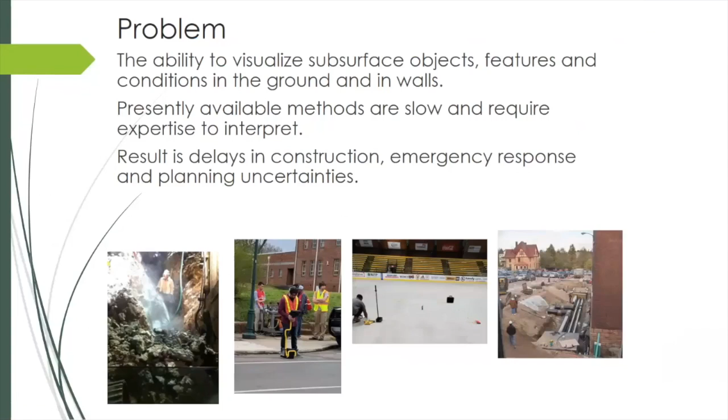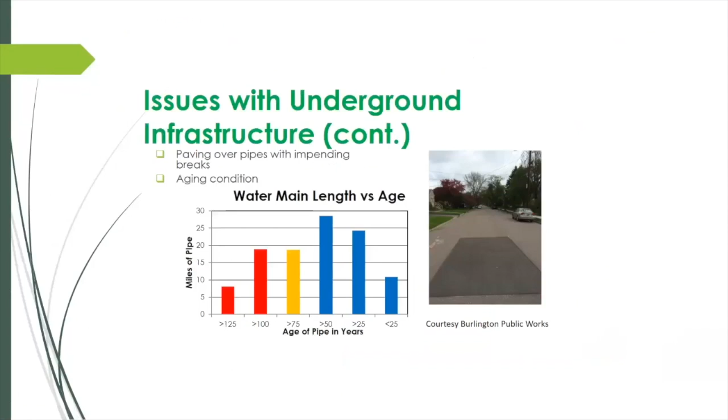Again, aging infrastructure, everyone's heard that talked about. You pave the road, and the winter does all the damage. It's annoying. So it's sort of a dream. The dream is when you put all this stuff together, like we heard: the physical locating, underground map, sensor network, other information, geosensing, verification, and security. If you can do all this. We're just doing a small part of that.

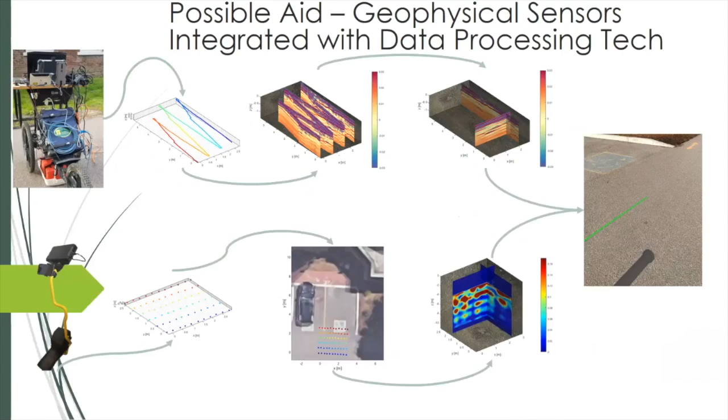One is to integrate the physical sensors with photogrammetric data processing technology. Here's two of them. Both of these are being fitted with augmented reality tools, gaming tools, for photogrammetric positioning. That allows you freeform and much more rapid selection, zigzag, something that's not easily done with these other instruments. Here's ground penetrating radar, 400 megahertz antenna. So here we have a smartphone, a camera, and gaming software feeding into Unity. Tango has now been replaced by Google's ARCore. Georeferencing with this system.

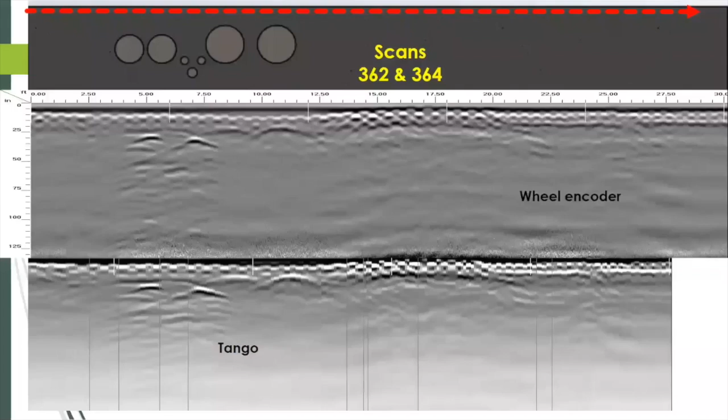Done several field tests, at least proof of principle. Here's a set of steam pipes in Chattanooga, and we can scan them and compare that with the measuring wheel. Nice looking data, at least for the very first system. Went out to Vallejo, California. They have a boneyard where public works stores all the pipes. And this is an indication of how challenging things can be with GPR. GPR only works in certain soils. This is the soil condition of old shale, clay shale. It can't penetrate very far, and we get trenches and trenches.

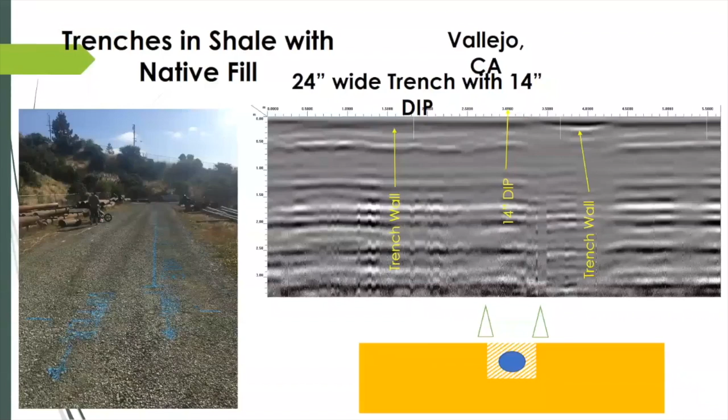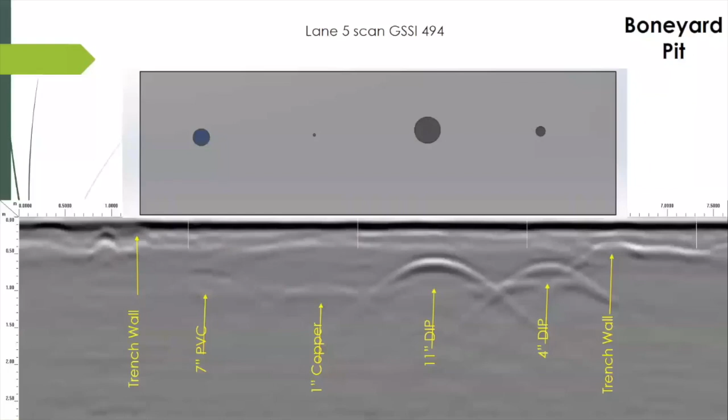This is a test pit. It's filled not with shale, but with native fill, backfill. And indeed, now the instruments photogrammetrically registered find pipes very nicely. Vine Street in Chattanooga. Again, found the pipes. There's a GIS overlay, but we're not allowed to show that. We had to sign with American Water. They said that they were right there. One's a main, one's a sewer main.

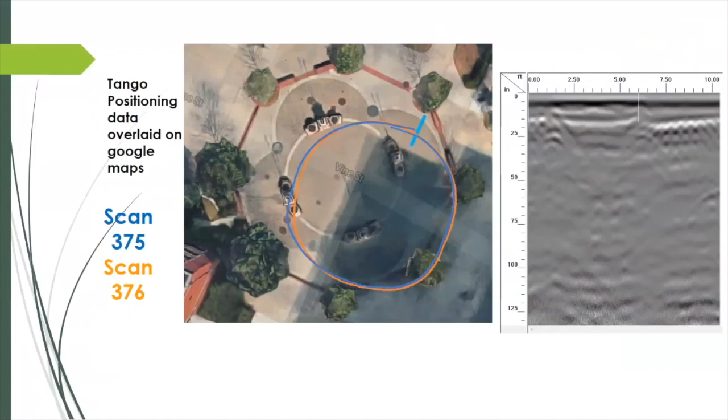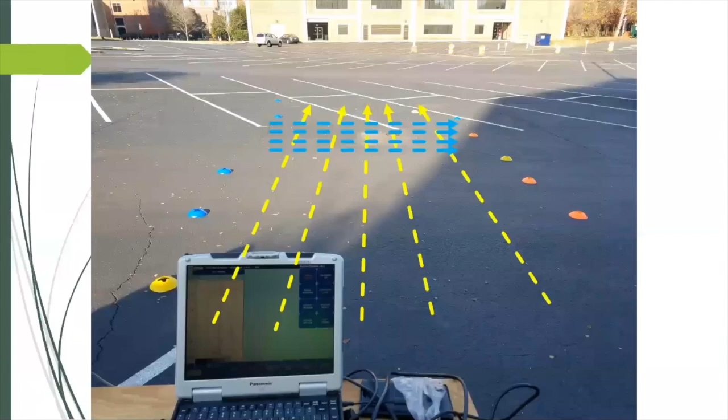And you can go in circles as well. And there's a wrap of a couple circles, just a piece of the data. We can go in circles, something that's not possible easily with a traditional GPR. Sinkhole again, covering an area. Parking lot sinkhole, you can map it out, that takes a while, or you can just come out here and scan. And what's in the sinkhole, you think of the foundation, certainly not a big hole.

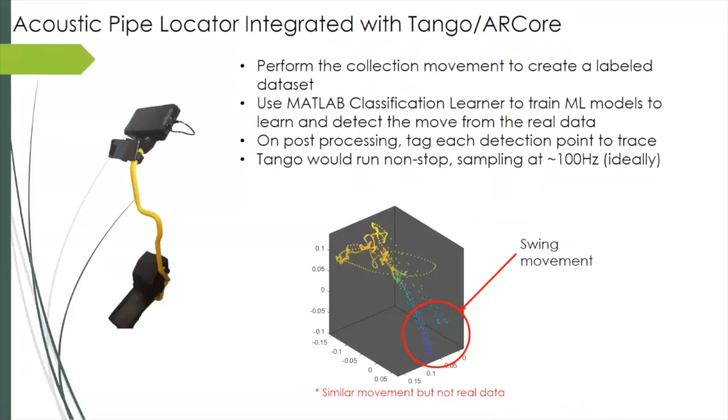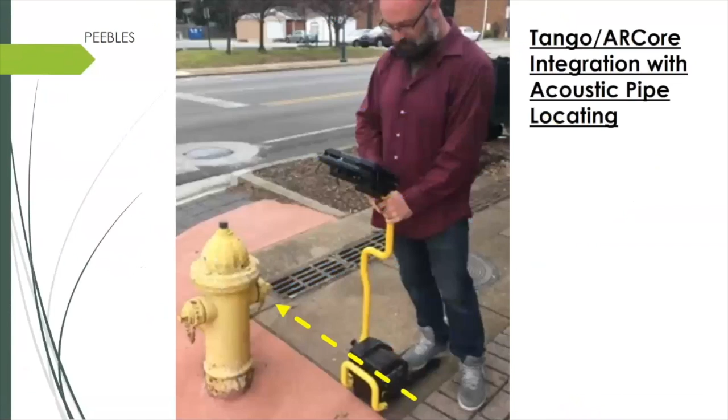Same with acoustic pipe locating. The acoustic system, you put the phone on there and get the 3D movement. This system has sort of an awkward movement for a traditional geolocator, in that you tilt it, lean on it, step on it, tilt it, lean on it, step on it. You can pick all those up and score it. So you can march around nicely with it. Here's movement of it, bringing a couple scans. Here we're doing it quickly along a fire hydrant. There's some nice pipes these instruments can discern. Again, this is GPR denied soil conditions.

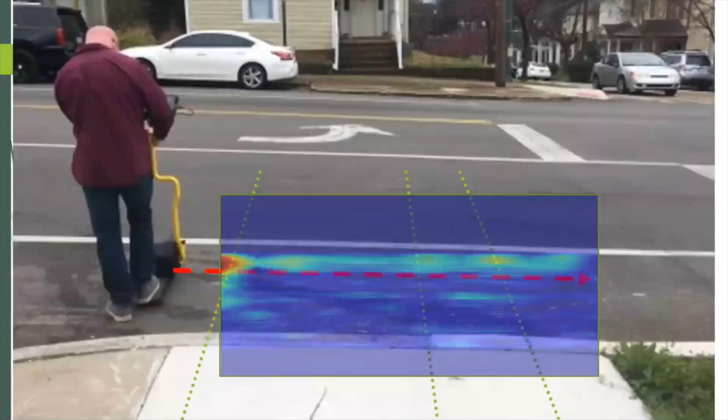Heard mention today of Internet of Things. Saw some nice data from sensor arrays.

Wi-Fi and wireless signals do not penetrate the ground very well. So you can run wires; it's one choice. Expensive, but works. Or you can try other electromagnetic bands. And one that's been used for some time, but is technically challenging, is low frequency waves. Here's a Navy base in Cutler, Maine that uses low frequency waves to talk to their submarines.

The basic idea is that you're transmitting the magnetic field side of the electromagnetic field. It's propagating. Can you do this for an Internet of Things, a subsurface infrastructure? So what's happened is some of the pieces have come into play. One is the magnetic signaling. Big difference. The traditional system uses large antennas, oscillating the currents.

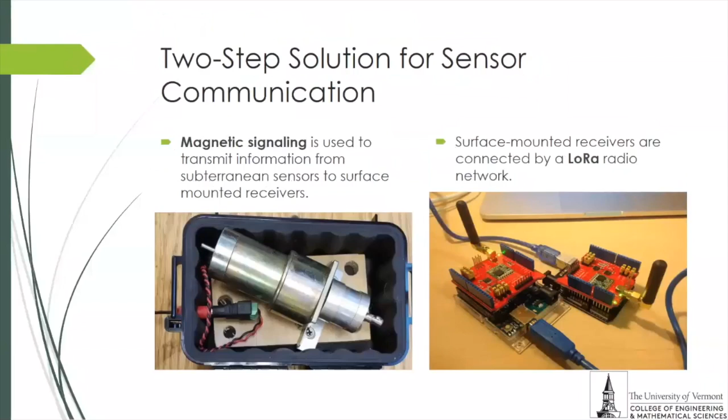Now you can do rotating neodymium magnets, something that's really only been possible in the last 20 years. They've become powerful enough, rare earth. So you just keep getting them from abroad. In traditional Internet of Things technology now, LoRa is a couple years old. Put this on a collar just to demonstrate it underground.

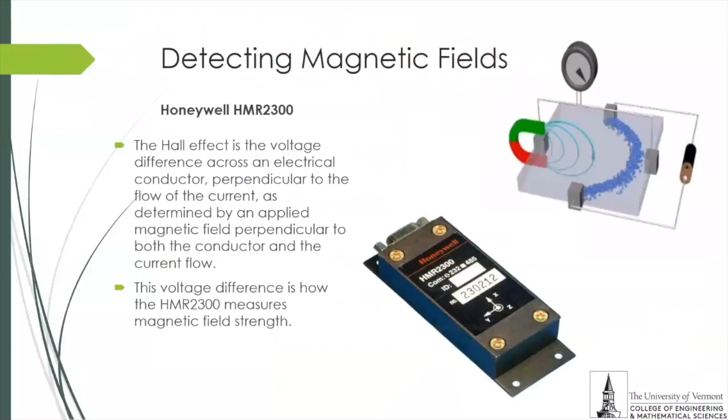Oh, the other piece of this is the magnetometers have become much more capable. This is a Hall effect transducer. Others, atomic magnetometers, are approaching the superconducting quantum interference devices, the most sensitive we have, at room temperature. So here's a cheap Honeywell Hall effect sensor.

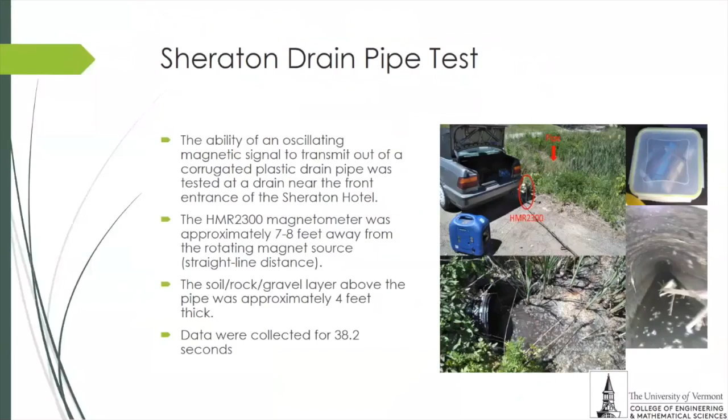Put it underground in the sewer pipe about 4 feet underground. And as the water flowed, we got data from what's buried. So you're getting slow data transmission, 3-axis here. Sort of like sending a text, not a video.

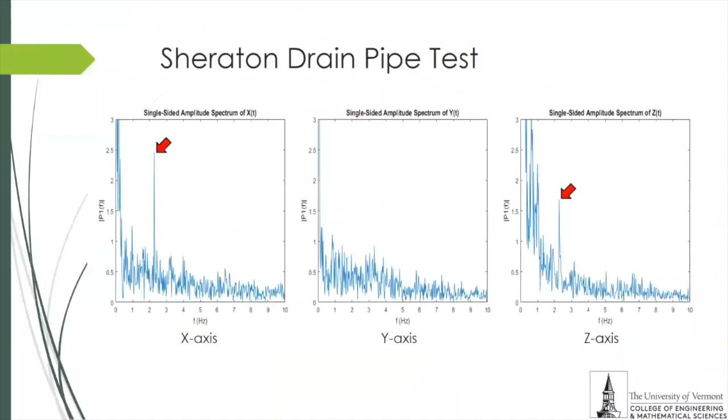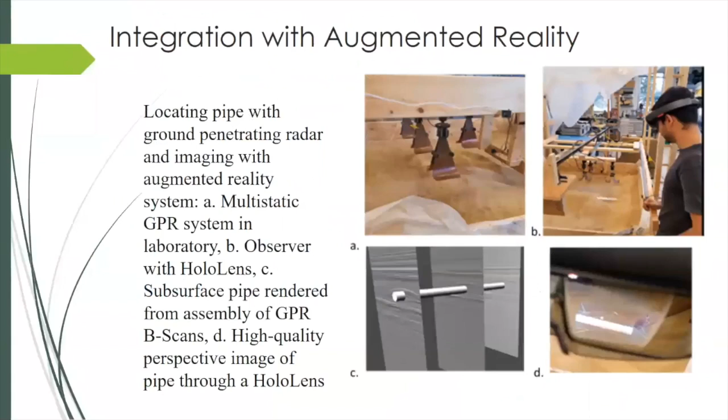Another sort of gaming thing that's come up is augmented reality. So here we have a 4-antenna multi-channel system, multi-channel GPR, homemade. Bury a pipe, find it, reconstruct it, and then view it in augmented reality, where it's completely underground. There might be some business use cases for that; it remains to be seen.

And then lastly, a very controversial topic is artificial intelligence. Until recently, I was a real skeptic. Now, seeing some of the tools and the ease with which they're implemented, there may be a role for this. And so here's a Van Gogh cat. You can take the pattern from Van Gogh and apply it to a cat. Very nice.

But you can use the same algorithm to declutter ground penetrating radar in a geophysics algorithm. And then also you can integrate a multi-channel handheld subsurface device detector. With that, I guess we'll wrap it up.

So, Dryver, what is the missing piece of technology in your mind? Oh, I think really the linkage. It's now not the pieces, but putting them together. You have better geophysical instruments linked together, linking that seamlessly with GIS, seamlessly with BIM, and maybe some of these other things, and maybe the AI.

And is that going to be something that comes out of industry, or is that going to be something that's coming out of the universities? I think the proof of concept can be put together by a university, but this quickly becomes a big enough effort that the ESRIs and the Autodesks and maybe the European open systems will play a role.